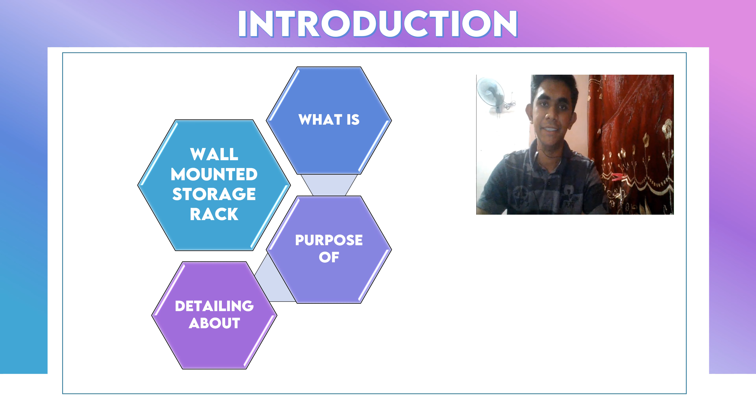Our final project title is wall mounted storage rack. So let's go to our presentation. Okay, now we move to introduction.

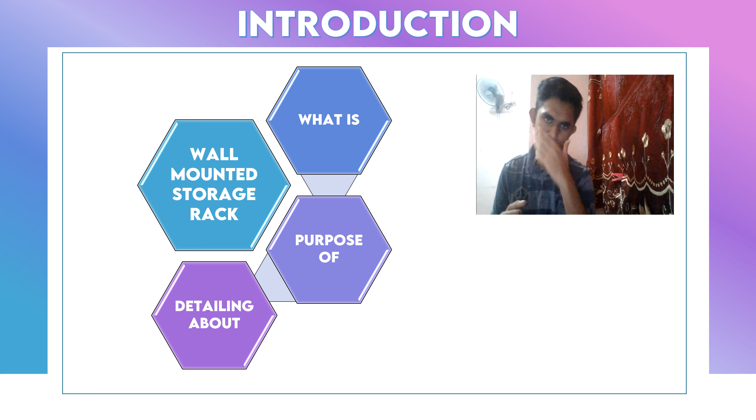First of all, what is a wall mounted storage rack? It is a fundamental tool that can store multiple small items. It is used in homes, businesses, stores, garages or elsewhere to hold items that are being stored, displayed, or offered for sale. The wall-mounted storage rack is raised off the ground, usually supported on a wall by screwing, riveting, or any other process that supports it against the wall.

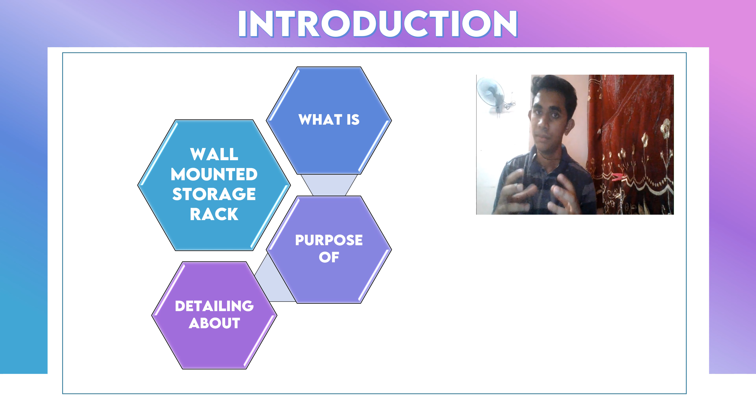A wall-mounted storage rack is also known as a shelf, mantel or counter. It can be attached to a wall or other vertical surface, or suspended from the ceiling. Usually it is easy to mount and there is plenty of room to store items in it. Most wall-mounted storage racks are made of plastic, wood, or steel.

Now we move to our second point, the purpose of the wall-mounted storage rack. The rack that we fabricated is used for multiple purposes, especially to store items. We can see that in some houses things are messed up and not properly arranged due to insufficient space to keep things. Besides that, this can also cause things to be misplaced and bring difficulty for the consumer to find them when needed.

For example, a car key is a small item that we can misplace by keeping it anywhere, and eventually we will forget and have to search for it. So by having the storage rack, we can store it there and know the key's location so it won't be misplaced. Consumers can save space and easily get what they want without misplacing or forgetting things by storing them in this wall-mounted storage rack.

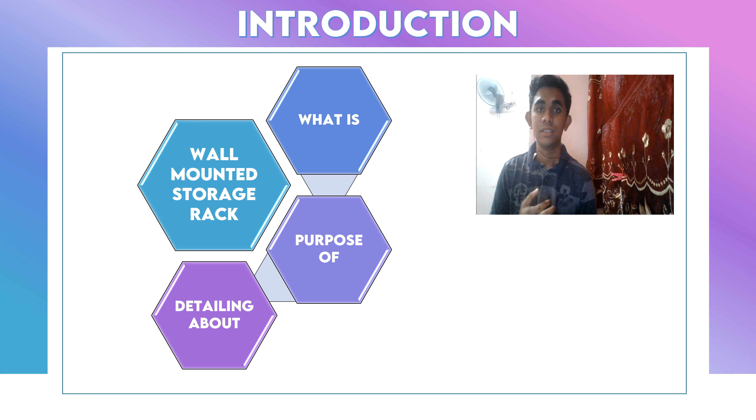Now we move to our third point, the wall-mounted storage rack made by our team. This is our project, to fabricate a wall-mounted storage rack.

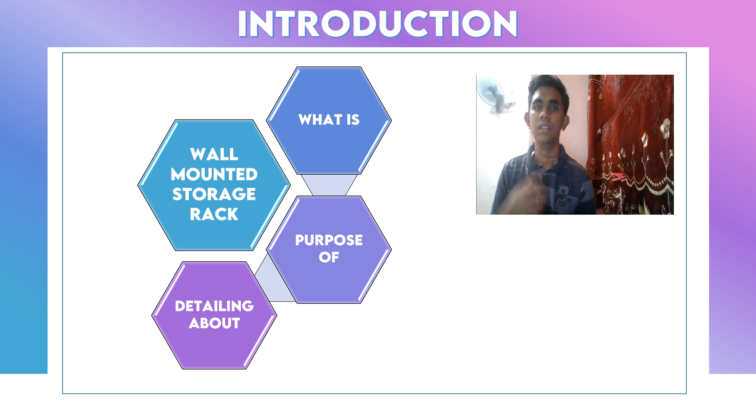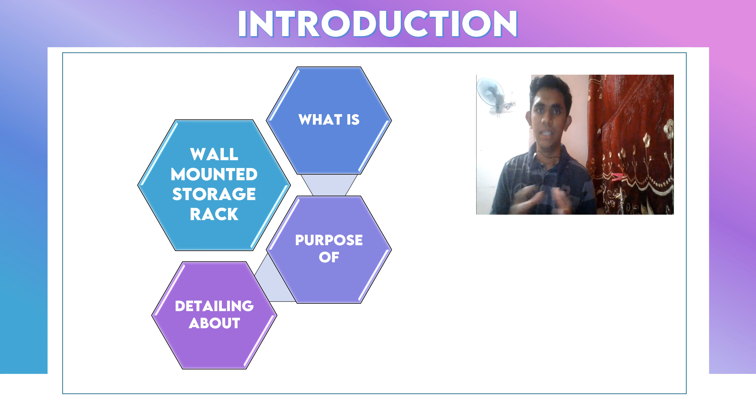This wall-mounted storage rack that we fabricated uses mild steel as the major material. This project is manufactured using laser cutting processes, bending processes, and joining processes, which is mechanical fastening such as rivets, to fabricate this wall-mounted storage rack.

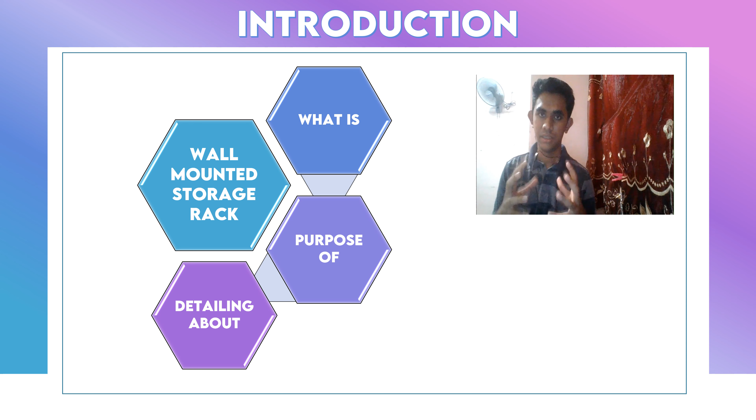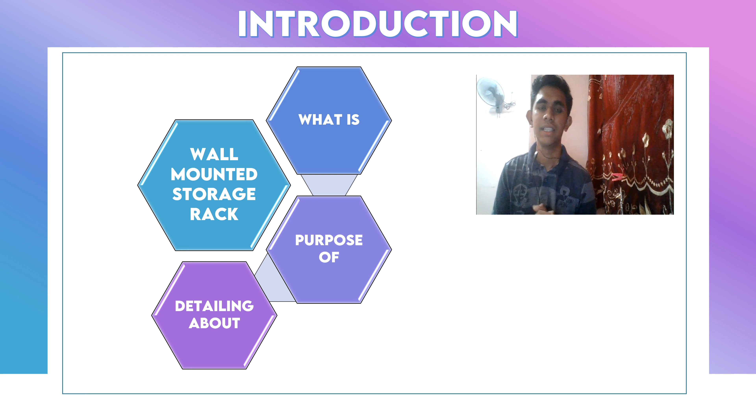Moreover, the project also involved tests that need to be done and verified, like the strength of the material, the durability of the material, and the convenience of the wall-mounted storage rack. This project was basically based on some research about the strength of material. Overall, this project required skill in product design using SolidWorks software, analysis of the problem, joining method, and fabrication as well.

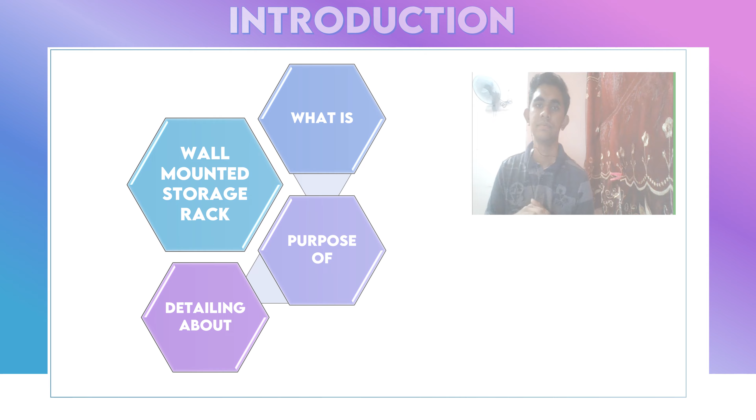Okay, next we move to objective. Our objective for this project is to design and fabricate a wall-mounted storage rack made from mild steel material. Next we move to the problem statement.

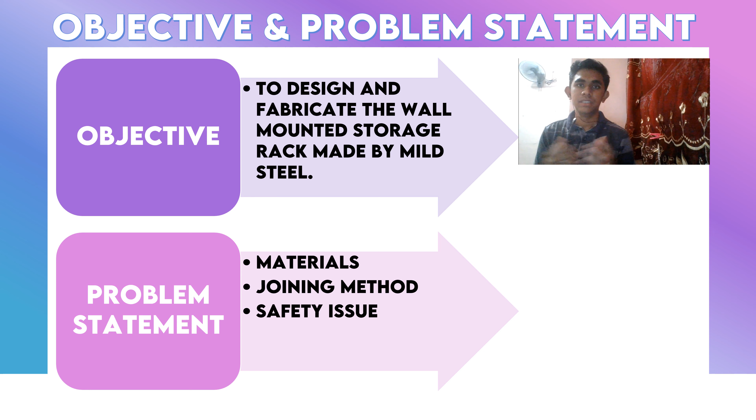The first point of the problem statement is material. As we know, a wall-mounted storage rack is a compulsory furniture need in houses, offices, garages, or elsewhere. There are still some disadvantages in the existing designs already in the market. Based on the survey gathered from consumers, there are not many wall-mounted storage racks made of steel or mild steel. Most of them are made of plastic, and because of that they can't hold up much weight; they easily fracture or break off. So material is important to consider.

Okay, we move to the second point of the problem statement, which is joining method. The joining method used in existing wall-mounted storage racks made of steel is not good enough. We can see that some wall-mounted storage racks made of steel rod are joined using spot weld only. If we just use spot weld, when we add more items or things which make it overweight, the spot weld can't withstand the pressure, so it will easily break off.

Then we can see that there are some wall-mounted storage racks made of plastic. Even with plastic, there are some joining methods used, such as glue. It also can't withstand the pressure due to overweight, so it can easily break off. So what I'm telling is that joining technology should be taken seriously. If not, it can easily break off, and the possibility of things falling down is very high.

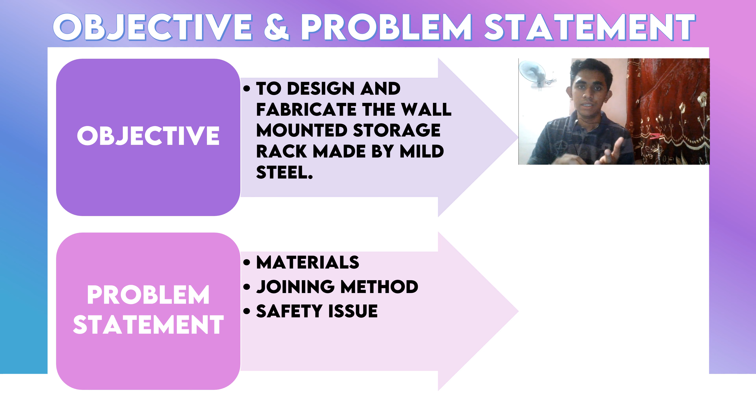Okay, so the last point of our problem statement is safety issue. What I mean by safety issue is like the previous two points I told in the problem statement: joining technology problem, material problem, which will get fractured or break off due to overweight. These can cause safety issues among the consumer. Let's say they hang a wall-mounted storage rack which is made of plastic, or made using joining technology like spot weld.

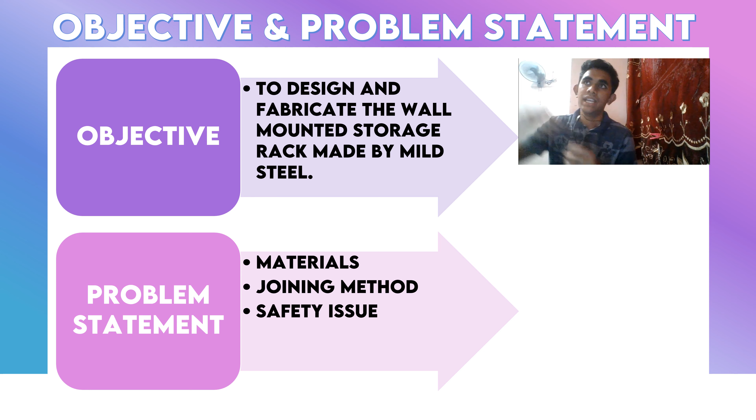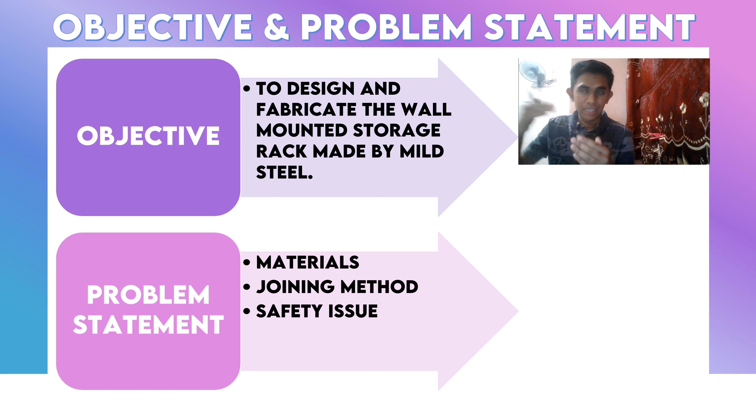They add up many things in it, and it can't withstand the overweight. Normally they have children in their house. So let's imagine suddenly it can't stand the overweight, and it breaks off or fractures, the things fall down. Someone under it, or any valuable things under it, can be damaged. It can hurt the people near it. So it is considered a safety issue as well.

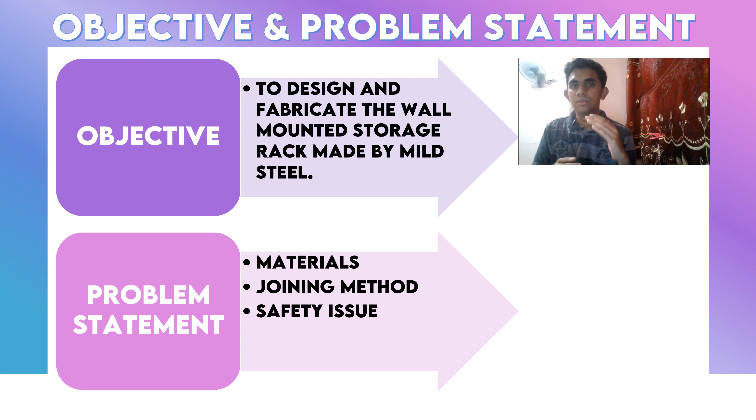So what I'm trying to tell is the material that we are using for the wall-mounted storage rack and the joining technology is very important, because the existing product of wall-mounted storages lacks safety consideration. So safety is important when it comes to serving the consumer. That's all from me, thank you.

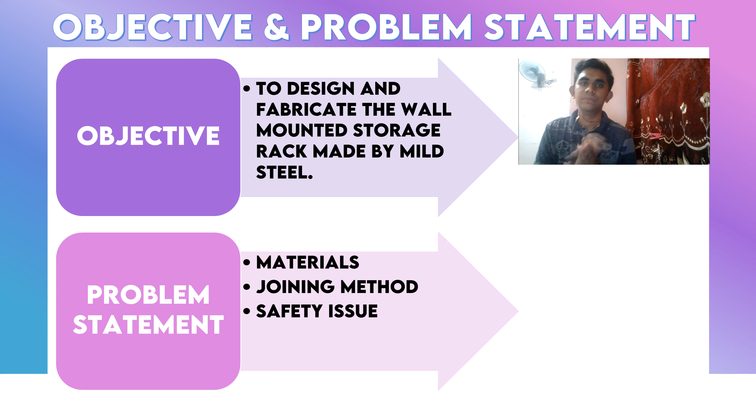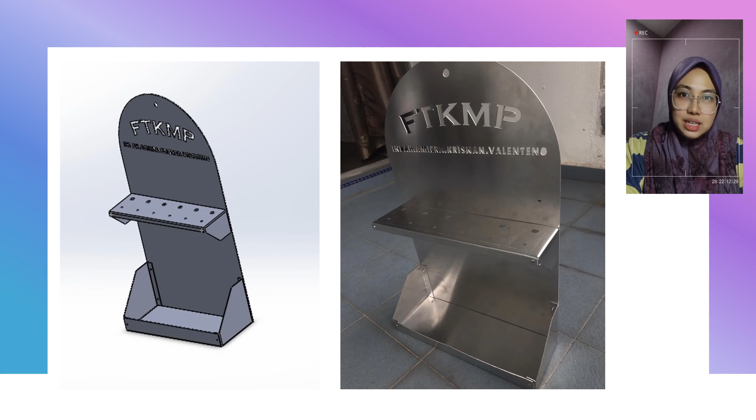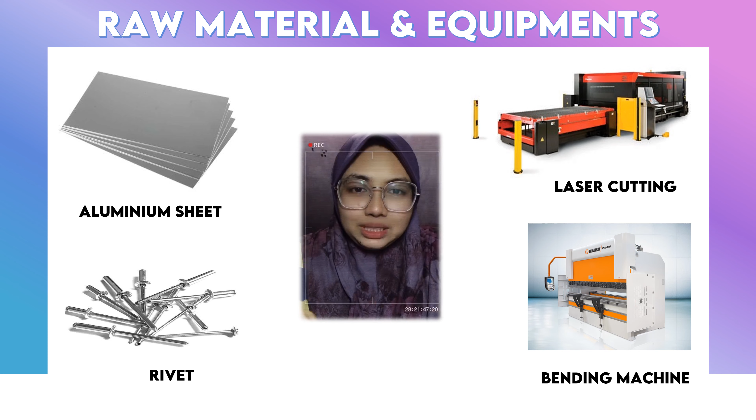Equipment and raw material: for equipment, we use laser cutting to cut our material, and bending to bend our parts. And for the raw material, we use aluminium sheet and rivet as the joining process.

For our product, we have 7 work processes. First, product planning, proposal, and discussion. Second, drawing, using SolidWorks and sheet metal features. Third, preparation of material, we use aluminium sheet. Fourth, laser cutting process, using a laser cutting machine. Fifth, bending process, we bend using a bending machine. Sixth, joining process, we use rivets. And lastly, complete product.

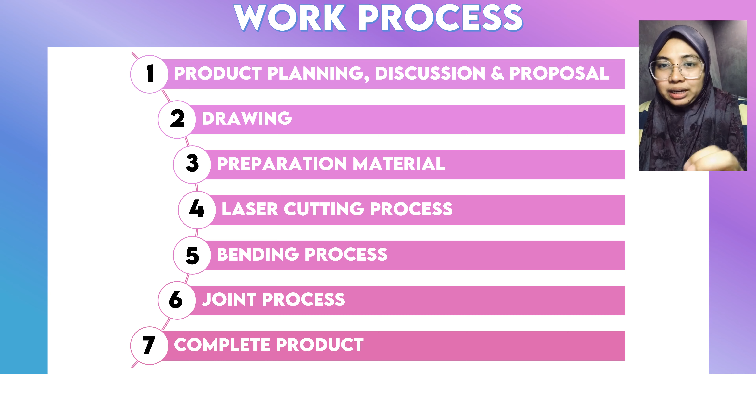Hi sir, I'm Krishnan. I'm going to present about the result. As we can see in the slide, we separated the result into 4.1 and 4.2. 4.1 is the result of each process. To make our product, we have gone through a few processes: laser cutting, bending, and joining.

The next process is bending. It happens on the first row and second row. After we cut the aluminium, we bend each of those laser-cut parts, to avoid the rack hurting the consumer or the people who will use our product. Not only that, after the bending process, the product looks more comfortable, more suitable, and also gives a nice, beautiful look. The pictures have also been uploaded in the slide.

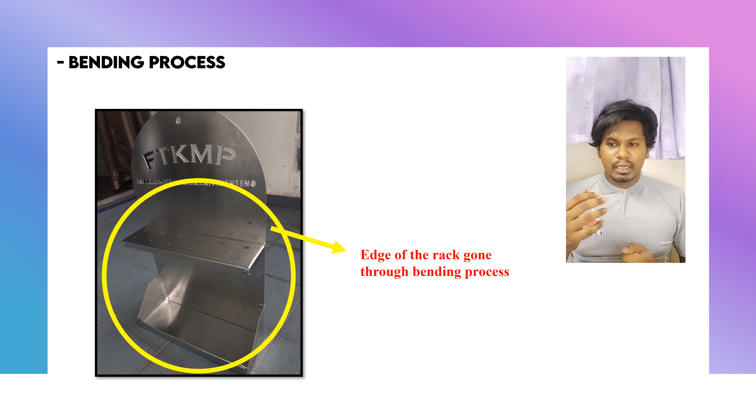Okay, now we go to 4.2. The final outcome of our product, after we're done, looks more beautiful, which can attract more customers. Not only that, our final product, the wall-mounted storage rack, is useful to organize our tools and workshop things.

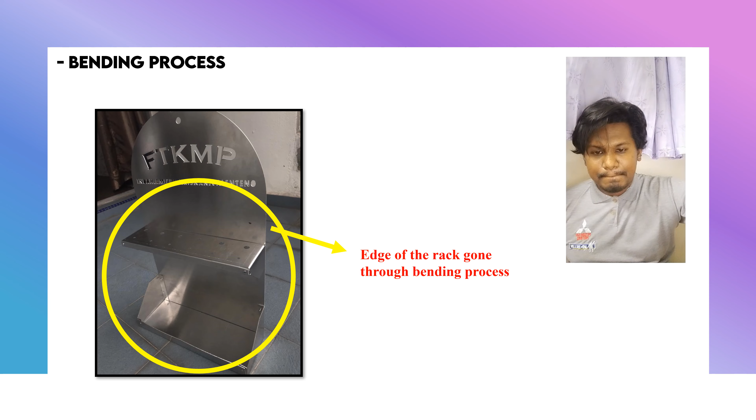For discussion, aluminum was chosen as the main material because it's wieldable, cost-effective, ductile, and recyclable. Estimated cost for raw material and other costs have been looked at in more detail for this product. We have been saving costs, and in addition have avoided time wastage.

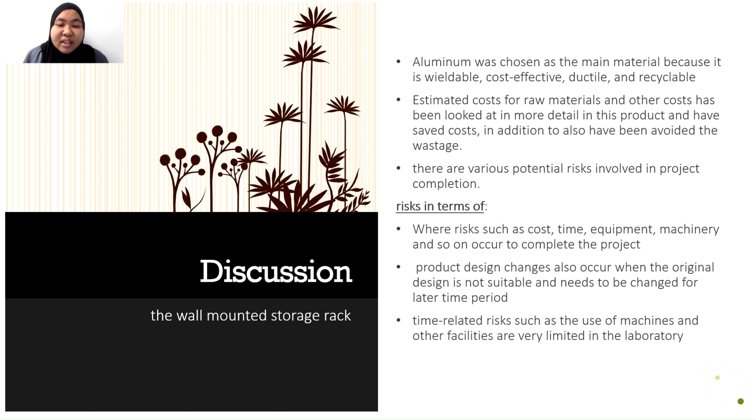There are various potential risks involved in the project completion. The risks in terms of cost, time, equipment, machinery, and so on occur to complete the project. Product design change also occurs when the original design is not suitable and needs to be changed for a later time period. Time-related risks such as use of machine and other facilities are very limited in the laboratory.

For conclusion, the wall-mounted storage rack project has met our project management objective, where the design and fabrication process were gone through to make the wall-mounted storage rack. Students were able to understand the basic principle and application of advanced machining and manufacturing, and the storage rack is a great and appreciated necessity for our workshop or garage.

And lastly, our product will help you keep the tools organized and carry the correct tool when you need it. That's all, thank you.